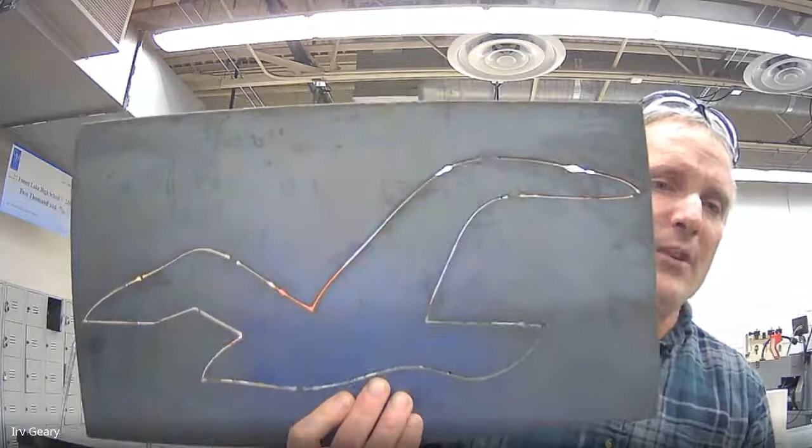When we get to making and designing the part, here's what you need to consider. Bare minimum part that you would design would be something like this. That's a pretty simple part. This was something a freshman made last quarter. This is the bare minimum I would even take for credit.

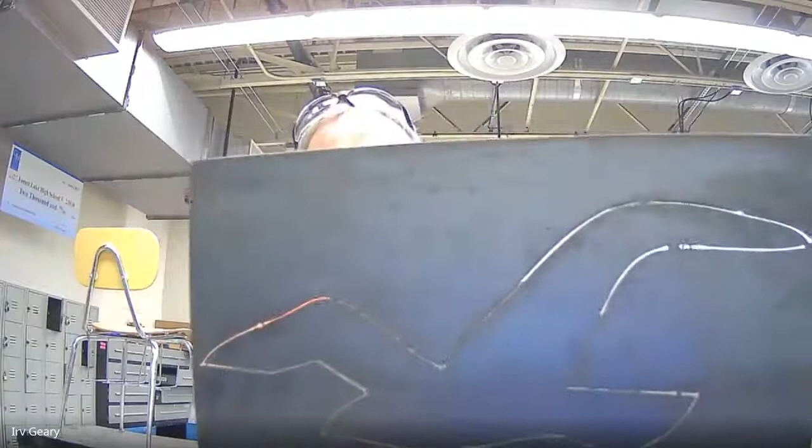But you can see, if we look at this, it's just like a seagull or a bird right here. All we did was cut lines out on here, and it cut out that object. I would have rather had them put their name or something else right there with it. I would have liked to have had it a little bit more complicated than this, but that's pretty simple.

That's really simple. You can go from that to something like this. That's from last semester, this was actually last year's project. This student didn't take this with them. But I'm showing you this.

Now, the reason I'm showing you this project is because there's some items on here that we need to look at. When we're cutting with the plasma cutter, we're going to cut lines.

So if we look at this, you can see there's lines. This entire eagle is all cut out with lines. We have to ask ourselves, do we want to keep? What do we want to keep? What do we want to get rid of?

Well, in this case right here, if we had just cut the outside of the eagle all the way around, this whole eagle would have fallen out of the project. We didn't want that. We wanted to keep the main outline of the eagle within the project, and this part that is solid that we can see, we refer to as negative and positive, or negative and solid space. This is solid space.

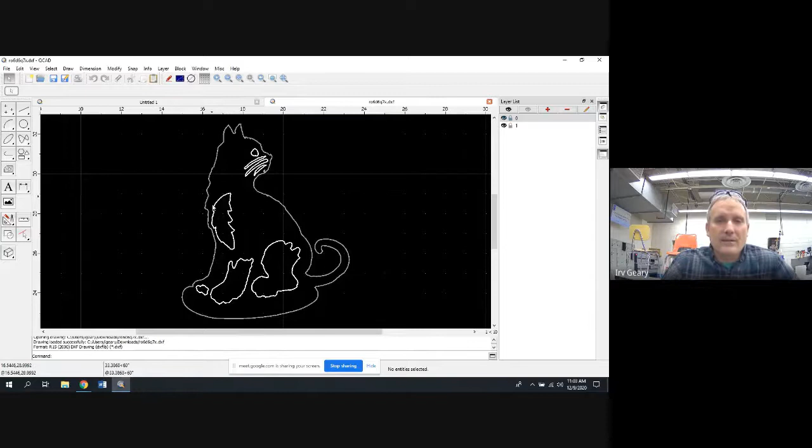Now I'm going to open up QCAD. QCAD is the software we're going to be working with. You can download this at home if you want, it's free, and it's a pretty simple program to use. If you search QCAD shareware, you can download that. So we're going to open this up—here's my QCAD. Now I'm going to go File, Open, and I want to open something that was in my downloads. Here's the one I just downloaded, there's the date on it, that was it right there. So if I open it—boom, here we go. Note, there's my cat, it's now all in line, so it's just single lines on here.

Also, it's in millimeters right here, and I don't want to work with it in millimeters. I want to work with it in inches. So here's what you need to do: I'm going to simply left click and drag a box over my cat.

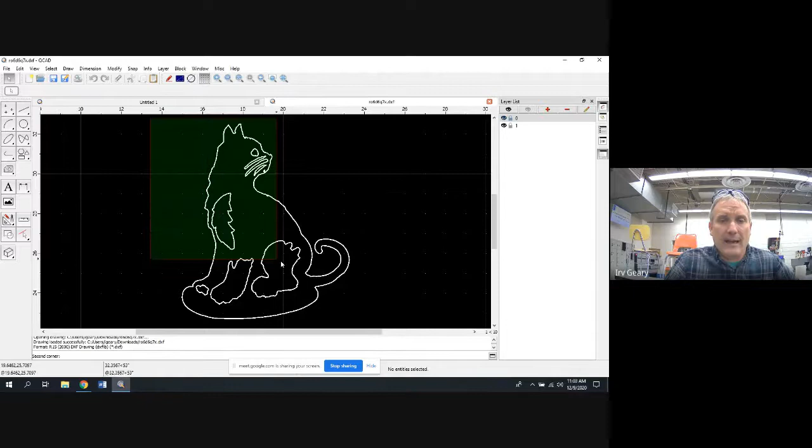There, my cat is all highlighted, it's selected. I'm going to go to Edit and do a copy paste, just like you do copy paste with anything else. I'm going to copy it, go over here, then go File, New, to start a brand new file.

Right here is my little red plus sign. We refer to this as the origin. The origin is 0 for x, and 0 for y. Anything above this line is positive y, anything below this line is negative y. So notice over here we're in a negative, right here we're in a positive.

We want to be in the positive y, and I want to be on the positive x. So that means wherever my drawing is, I want to put it over in this quadrant right here. I don't want to be down here, I don't want to be over there. I want to be right in here, because that's positive x, positive y.

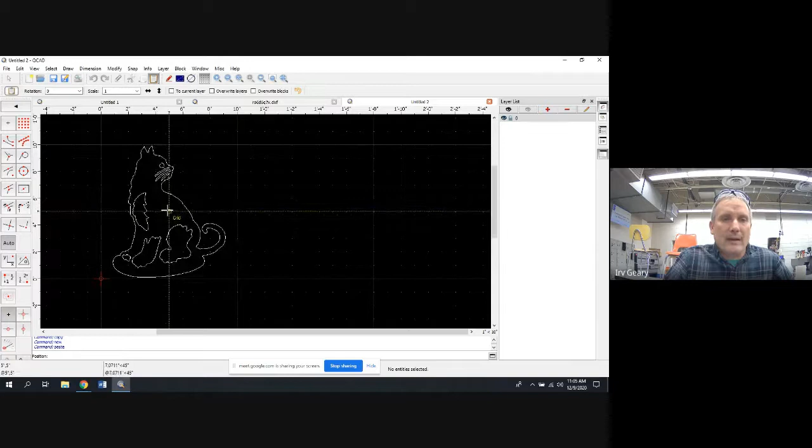So we're going to go Edit, Paste, and there's my cat. I'm going to click on it. Now, if it did not put it in the exact place that I wanted, I'm going to show you how to move it. Again, I drag a box over my cat and highlight it.

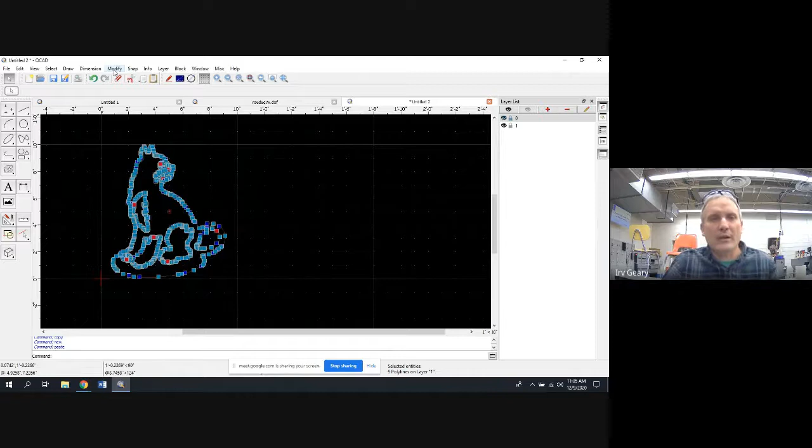90% of the tools you will use on QCAD can be found under this tab right here, Modify. Almost every single tool you're going to use will be in Modify. If I click on Modify, you can see I can move, rotate, scale, flip it, whatever I want to do. Right now, we're just going to move it.

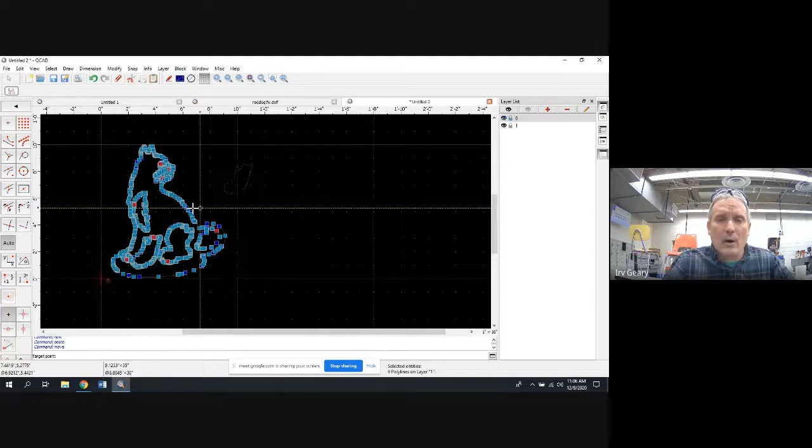So here's my base location. I'm going to select the lower left-hand corner of my cat, because that's where I want my origin to be. The origin should always be in the lower left-hand corner. Now when I move it around, I can move it exactly to my origin. Then I can either delete the original, keep the original, or have multiples.

I'm just going to delete it. There, so you can see we moved it just a little bit.

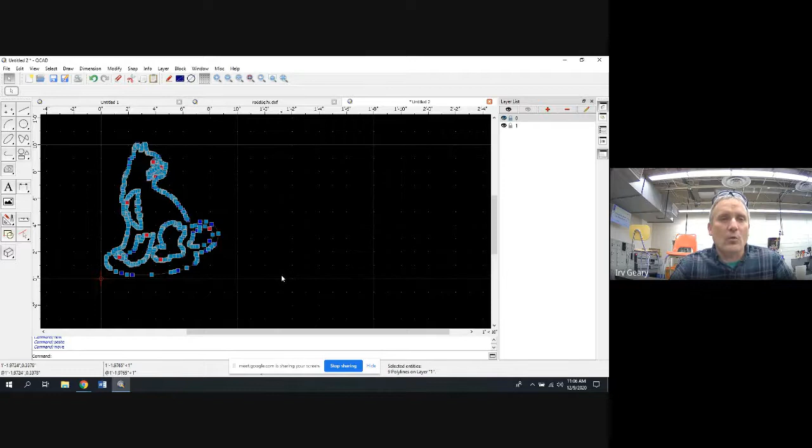The other thing you need to keep in mind is I'm going to give you a 1 foot square piece of material to work with. So we're going to draw a square box around this cat that we're ultimately going to cut out, and I want it to be 1 foot by 1 foot.

So I'm going to come over here really quick and select a square. You can see these are my drawing tools, and the tool I want to draw with is a square. So I'm going to select on my origin and draw a box, and I want my box to be 1 foot by 1 foot.

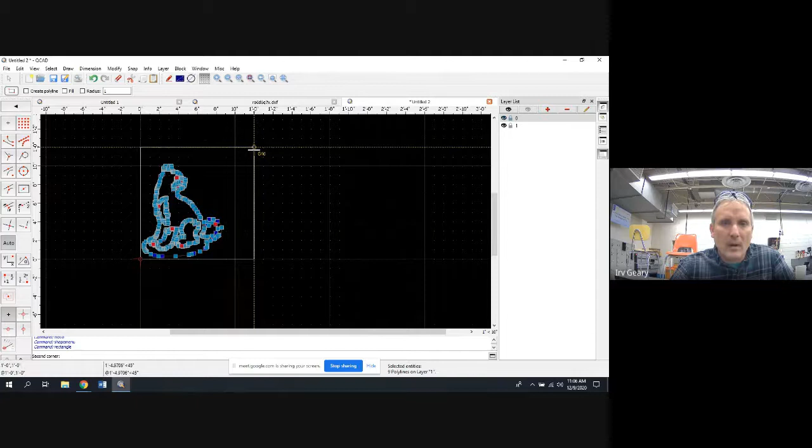There. If you hit escape, that always backs you up, so I'm going to hit escape a couple times, and it brings me back to my main menu. So now you can see we've got this cat in here. If my cat is too big or small, I can highlight it just like it's highlighted right now.

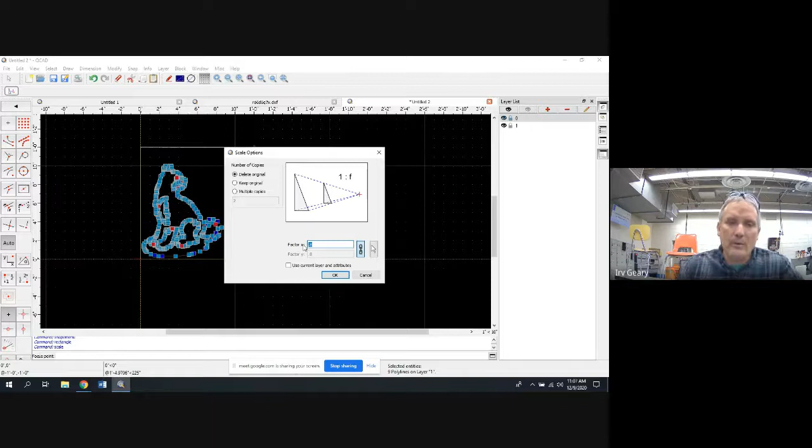I can go to Modify and scale it. Again, I'm going to select on the origin. And now I can say, well, how big do I want it to be, or how small do I want it to be? Notice right here, this is my X factor. Your X factor, anything greater than 1 is going to make your object bigger, anything smaller than 1 will make your object smaller.

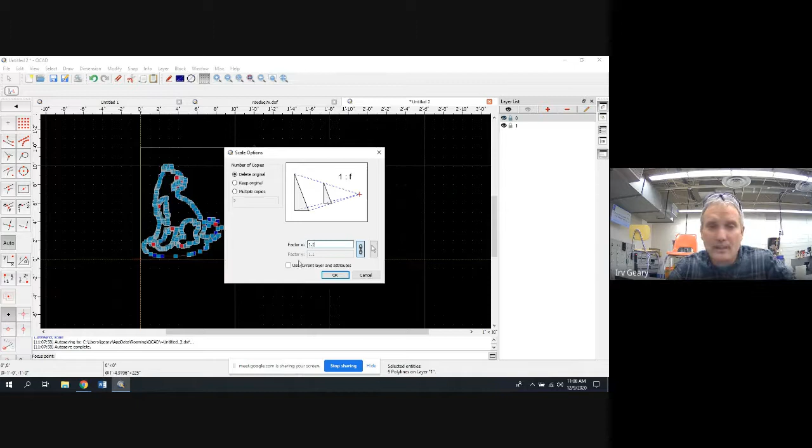So if I really want to shrink it, I might have an X factor of like 0.1, that would shrink it 10 times. Right now it's at 0.8, so that would make it 80% of this size. I'm going to make it actually bigger, I'm going to make it 1.1, so now I'm making it 10% bigger than it is right now. If I hit OK, there you can see my cat just got a little bit bigger. All right, so now we're going to zoom in on my cat and let's take a look at it.

Remember I said anytime I have an object, if the plasma cutter goes all the way around it and cuts continuously, that part is going to fall out. Well, if we cut this right now, this section, the plasma cutter is going to go all the way around it. This is going to fall out. That will fall out. That's going to fall out, as will the eye and all those whiskers. If we want that to happen, that's perfectly fine.

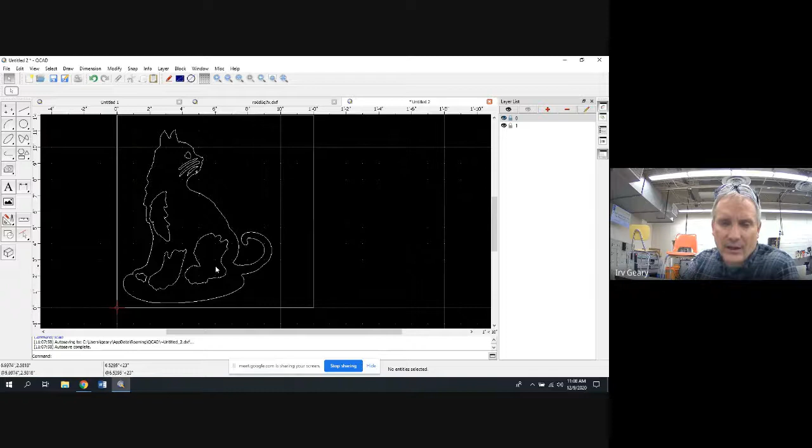But if we don't want that to happen, then we need to put in tabs. So you have to ask yourself, do I want these to fall out, or do I just want to have lines cut on here, but keep it in place? Right now my entire cat is going to cut out, and I want to keep the outline of my cat, because otherwise it would just disappear into my big square plate.

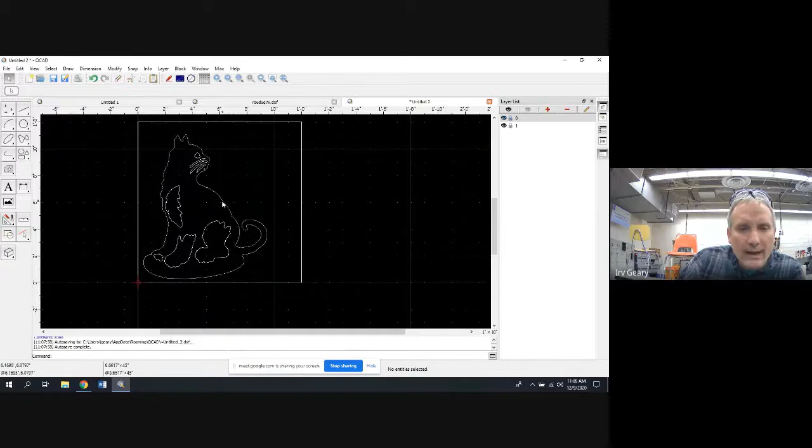So we're going to drag a box and highlight it again. I actually have to back up a second. Notice when I touch on this line, the whole outline of the cat highlights. That's problematic because it's not going to let me break that line up. I need to break these into miniature little lines.

So I'm going to do what is called an explosion. I'm going to highlight my cat. Oop, I didn't get the outside of it. There, now we got my cat.

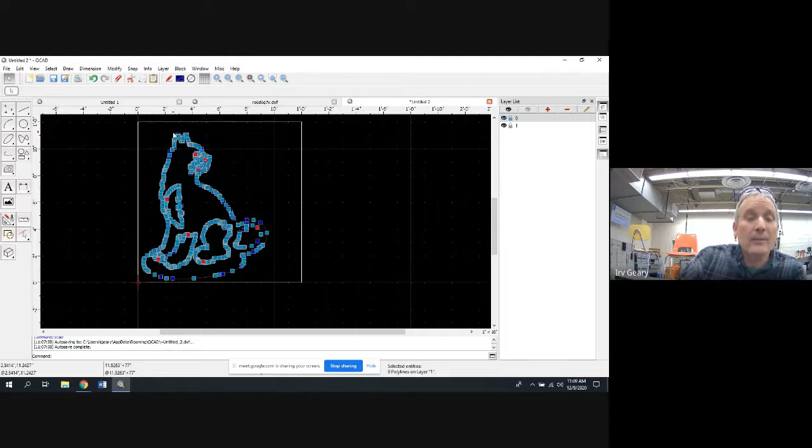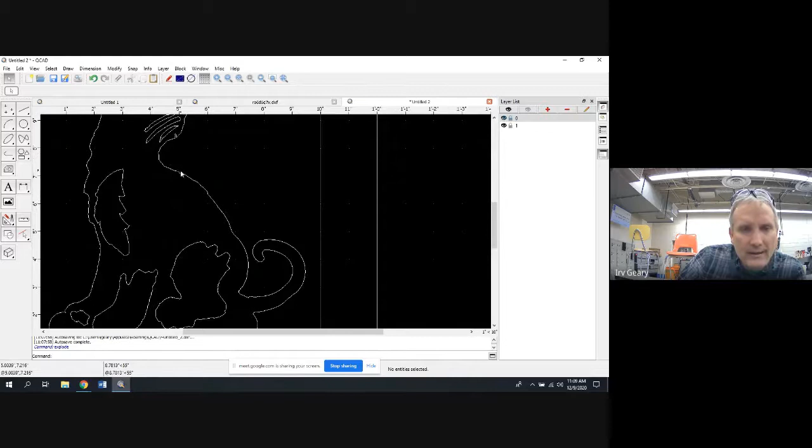All of the tools are located under my Modify menu. If I scroll down, there's my explode. So right here I can click explode, and notice it changed colors. What it did is instead of all of these lines being connected, you can see there's now miniature lines, little sections of line on here. That's what we want because that's going to allow us to break out the little tabs that we need to break out.

Let me show you how to make tabs. I want to go along here and cut out a section of this line so that my cat won't fall out. I'm going to do that with my lines.

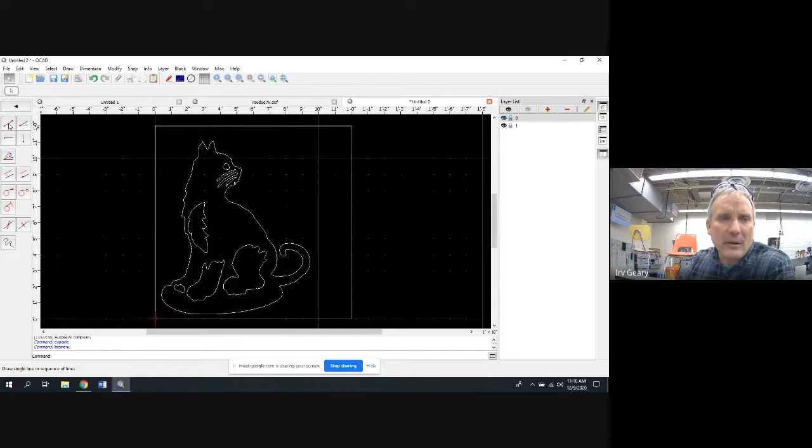I'm going to come over here, grab my line tool, and make what I call staples. I'm going to zoom in here, just click a line, and I just drew three random lines. Then I'm going to hit escape. It breaks it off. Notice that looks like a staple, like there's a staple sticking out of the back of the cat. I'm going to do a couple of those.

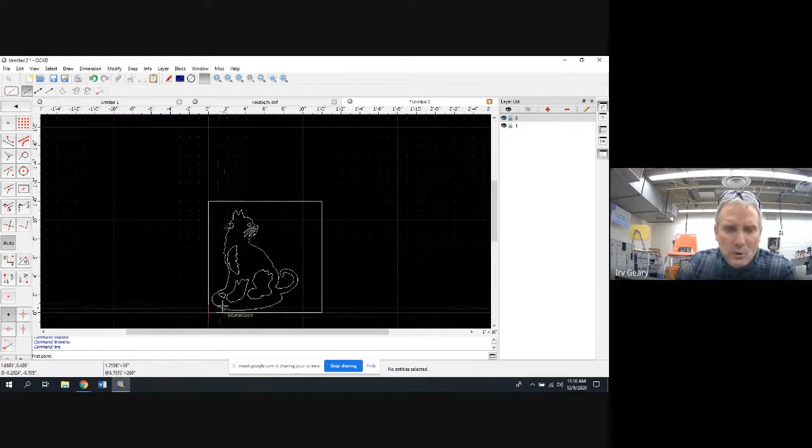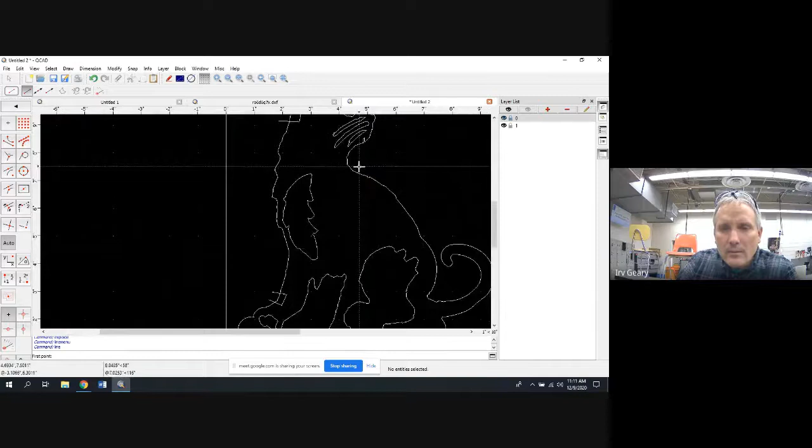So I'm going to come down here. There's a staple. I'm going to come over here. Usually when I'm doing it, I try to put them in really indiscriminate places so people won't see them, but for demonstration purposes I'm just doing them really quickly. There's a staple. There's a staple. Now, what we're going to do is cut out the part of the cat that's in between the staple, and I'll show you why we needed that staple in there right now.

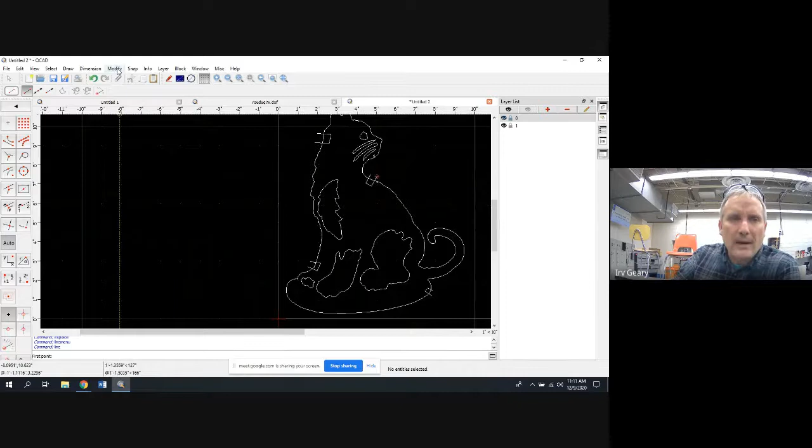So we want to cut out this little section of line. We do that with a tool that's in Modify. I'm going to hit Escape. This is important, pay attention. In order to cut out a line that we don't want, I go to Modify and I go Break Out Segment. Now watch what happens when I zoom in here to my breakout segment. I can click whatever I click on, and it's going to delete right up to the line that I drew in.

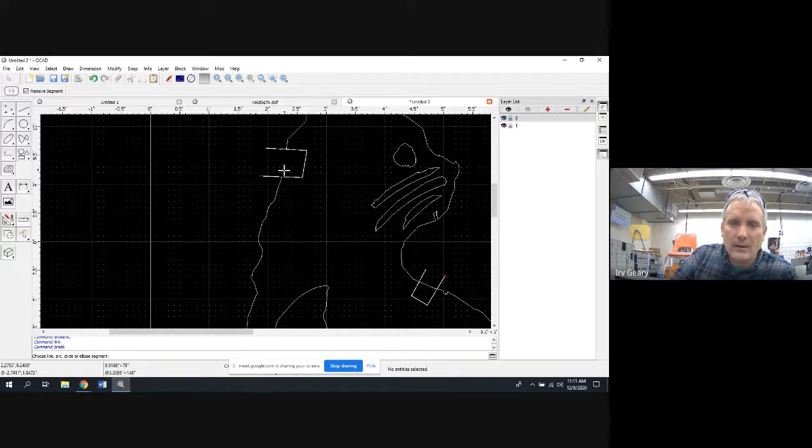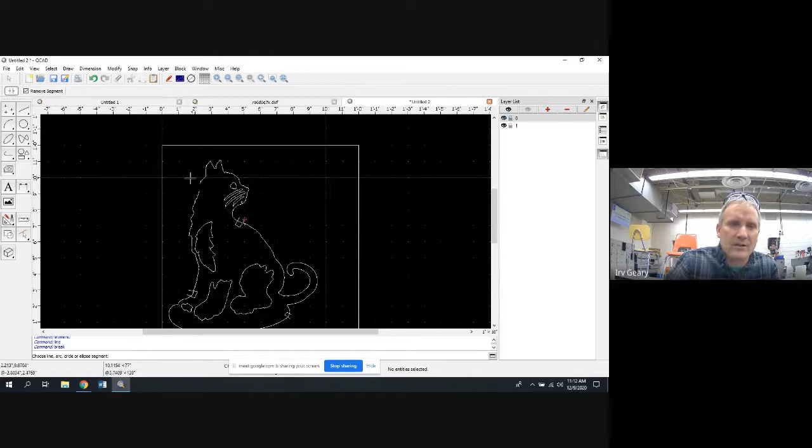I'm going to delete that one. Now I just got rid of that section of the cat. I now need to get rid of the staple. So I'm going to delete the staple right there. Now you can see the plasma cutter is going to cut, it's going to stop right here, pick up, jump over, and start cutting again right there. So now my cat is connected to the main object, my main piece of sheet metal.

I'm going to do the same thing right here. Bunch of little lines in here. There, I just deleted all those lines. Now I'm deleting my staple. There, I just made a tab. That is a tab.

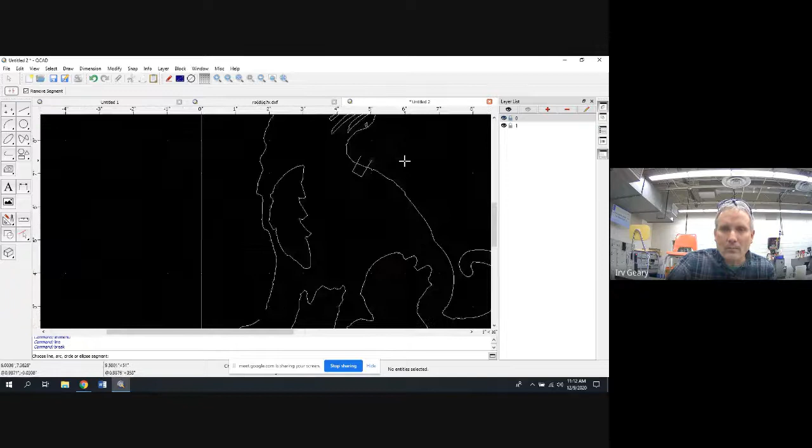I'm going to make a tab right here, and we'll make another tab right there. Okay, now my cat is connected to the main object. The outline of my cat will not fall out.

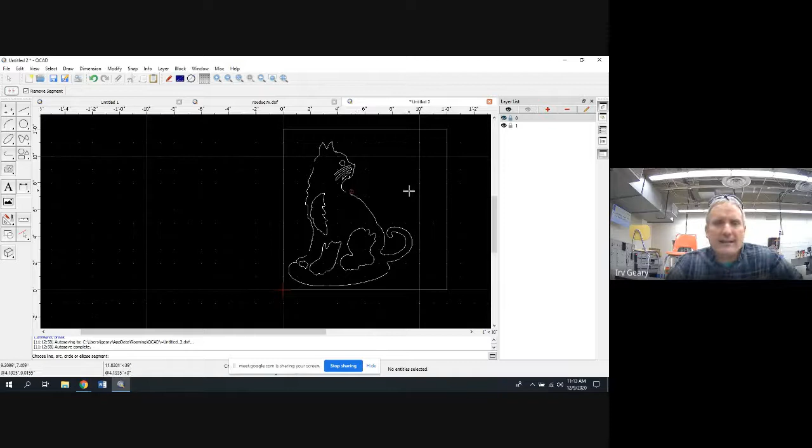This is all going to stay as positive space, or positive material. I'm going to let this paw print fall out, as well as all of these other sections. I'm just going to let those fall out, I don't care about those. The other thing I want to do on here is add some text. You could put your name in there, you can put 'I love kitty' in there, whatever you want.

I'm going to put something simple in there. Notice over here, I'm going to select the text tool. So I click on the text tool, and now I can type whatever I want. You'll notice that you have a whole bunch of different fonts to use. I can change the height of the font, change the spacing, make them italicized, rotate them. I can do all kinds of things with my text. I'm just going to make simple text.

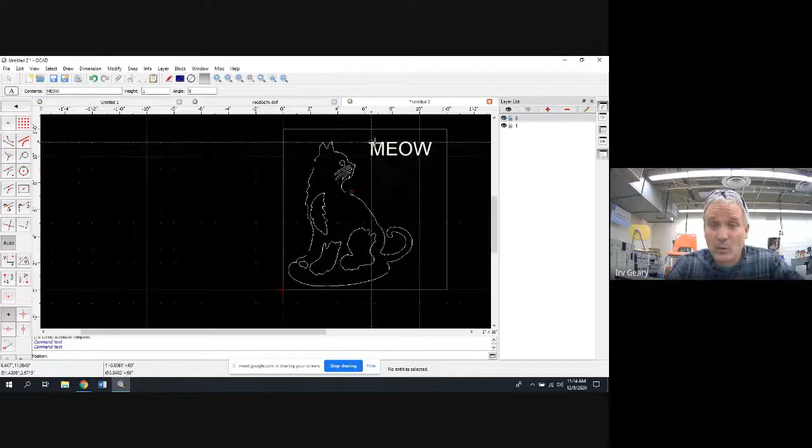What does the cat say? Cat says meow. There, that's what my cat says. So I'm going to hit OK. Notice I can drag the text and put it wherever I want. So I'm going to put my text right there. Hit escape. Okay, zooming in with the scrolly wheel.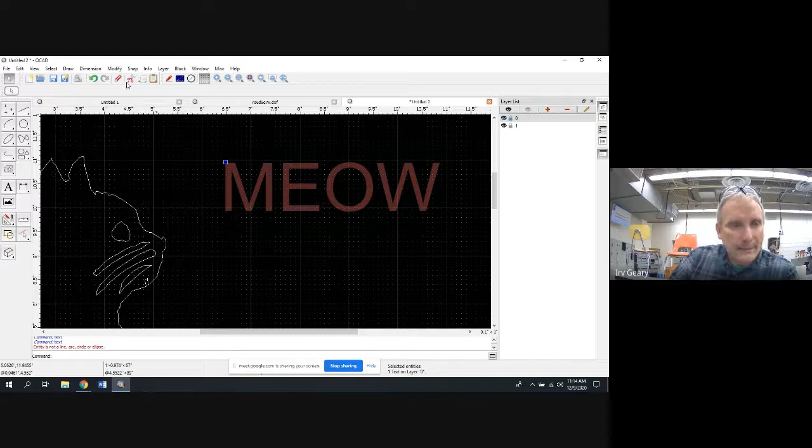If I look at my text, notice how if I click on it, it all highlights, just like with the side of the cat. When I selected that, it all highlighted. So I have to do the same thing to my text that I did with my cat. I need to explode it. I'm going to drag a box around my text, go to Modify, that's where all my tools are located, Modify, Explode, and you can see now it's exploded. I'm going to actually explode it one more time just to break it up a little bit more. There we go.

Now if I look at my text, they're all simple lines. The plasma cutter is going to cut wherever there's a line. So right now it's going to cut on this entire line, it's going to cut the M, the M is going to fall out, it's going to be negative space. Good, that's what we want. This is going to do the same thing as the E. However, the O is problematic because it's going to cut out the middle of the O, and then it's going to cut out the outside of the O, and we're not going to see the center of the O. The O is an island, so we want to create a bridge that goes from my island to my mainland.

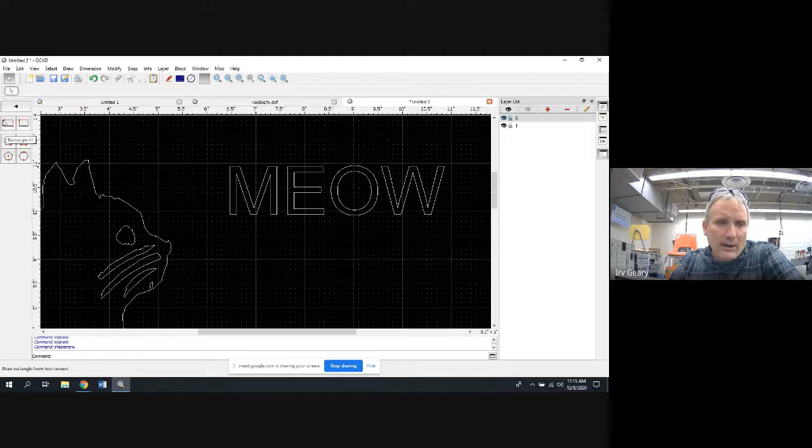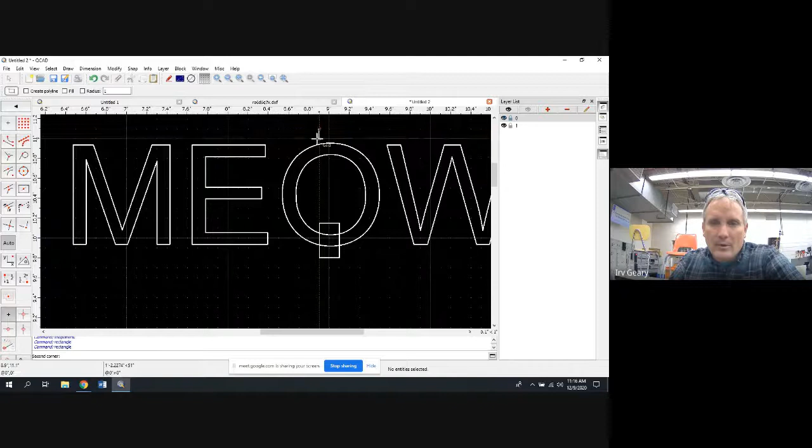Here's how we make bridges. Bridges are basically the same as making tabs, except I like to make them with squares. So I'm going to go over here and grab my rectangle box, under this drawing tool right over here, and make a box. I'm going to zoom in here, and now I'm just going to draw a rectangular box. Hit escape. And I'm going to draw another rectangular box. Boom, there we go. So we've got these two rectangular boxes in here, but we need to delete out some of this material that we don't want.

So we're going to do it the same way we did with tabs. We're going to go to Modify, Breakout Segment, and I'm going to break out the middle of this O that I don't want. I now made a bridge going from here to here, but I've got to get rid of my rectangle that I put in. So I'm going to delete that. Do not delete these sections right here — you need to leave those in place because the plasma cutter is going to come along and follow that line and then come back through. If you delete it, you're not going to have the negative space in there.

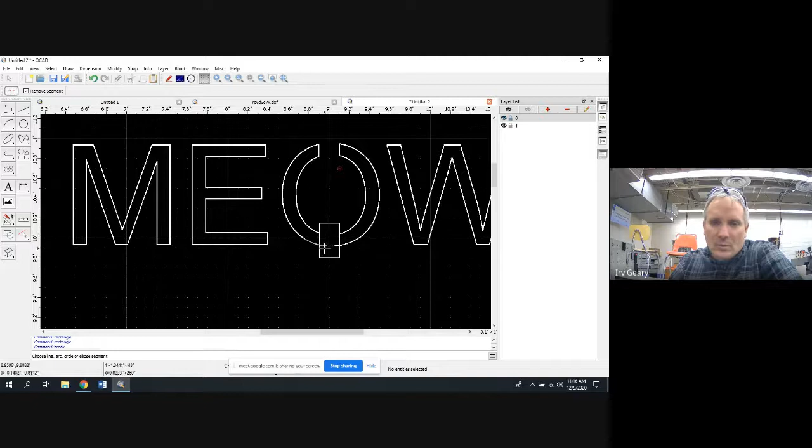So I'm going to delete all of that. There we go, now I've got bridges. There's a bridge connecting the island of the O to the mainland. So that's a bridge. That's a tab. That's the difference between a bridge and a tab.

All right, so now you've got your object ready to cut out. We just need to take this over to the plasma cutter. We're going to set it up on the plasma cutter, and that's in the other video that I already have on Canvas. Cutting this out is easy, it's going to take a couple of minutes max. All the hard work you have to do is what I just showed you — it's all of the CAD work.

So now we're going to save this. I want to show you how we save this. Watch. Last hour, I accidentally unplugged my camera when I did this. So I'm going to plug in my jump drive. Notice when I plug in my jump drive, it says Geary Jump is plugged in. No, I'm not going to scan it. I'm going to go over here.

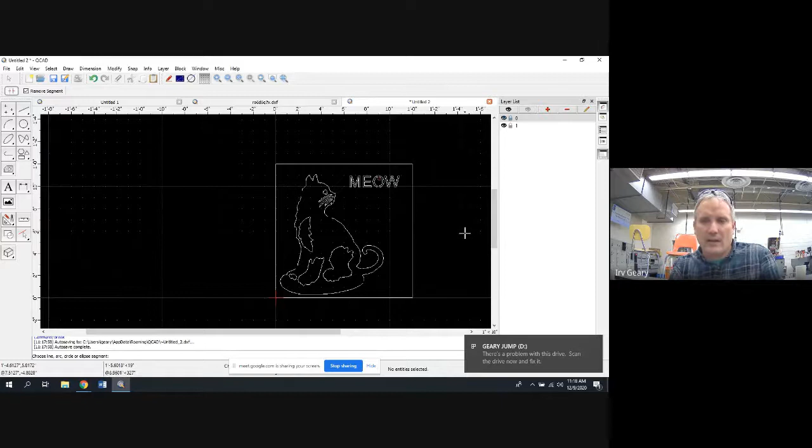I'm going to go File, Save As. When I go to Save As, I need to go down here to the Geary Jump drive. See, it says Geary Jump. If I open this up, right here, 4th hour metals — I'm going to select 4th hour metals. Now I can call it whatever I want. I'm going to call it meow.

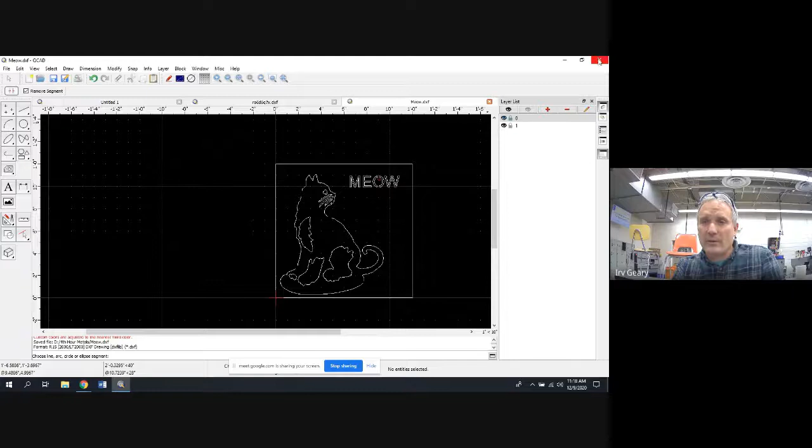There it is, I'm going to overwrite the old file. Okay, this is now saved on the jump drive. I can now close this and get rid of it. I'm out here, watch my screen.

In order to delete or take out the jump drive, do not just jerk it out. You need to go down to this little upside down V icon and click on it. That gives you a couple of extra options. Select the one that says safely remove the hardware and eject the media. Click that and eject the flash drive. Now I can pull my flash drive out.

Okay, I'm going to shut that off really quick. Going back here, so don't pull the flash drive out without doing that eject process.

You can pull your flash drive out without ejecting it. I've done it many, many times and you'll probably be just fine. 95% of the time you can just jerk that flash drive out of there. However, that 5% of the time that you do it, this thing has got current going through it, and when you pull it out you're going to fry it, which means you'll burn up and lose all the files that are on it. And if you're the one that loses all of your classmates' files, they're not going to be happy with you. So it's easy to take that extra 30 seconds, hit eject flash drive, then pull it out.

Once we have that CAD process done, we can save it on the flash drive. We're going to take it to the CNC, plug it in on the CNC. The other video that's on Canvas is going to show you how to take that drawing and load it up into the CAD-CAM processor. The CAD-CAM processor will write your code for you.